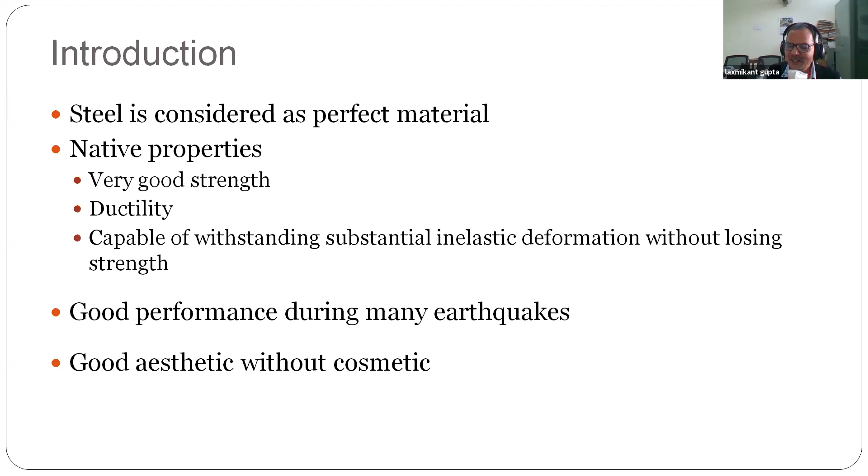Then what are the types of this steel? Now, there has been a lot of change in our country in the last 20 years. The use of structural steel has increased, and therefore a lot of work has been done in this particular area.

The first and foremost thing that has been done is that a single code has come out merging all old codes. If you refer to some book of an old edition, they will mention different names for the structural steel code. Now there is only a single code, IS 2062, in which IS 226, 1977, and 8500 have all been merged together. There is now a single code dealing with structural steel of all grades, so IS 2062 covers structural steel of medium strength and high strength both.

Then there is another steel, stainless steel, which is very rarely used for structures. Then fire resistant steel, also called thermomechanically treated steel, which performs better than ordinary steel under fire - this is specially for fire resistance.

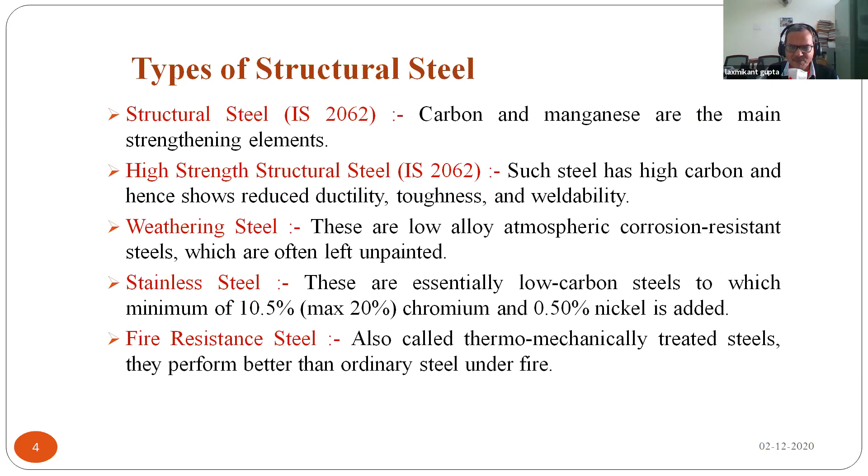Then the physical properties should be used uniformly. IS 800:2007 has given parameters which should not be assumed as different values. Density is 7850; even IS 875 part 1 for dead load also mentions 7850. Modulus of elasticity E is 2.0 into 10 to the power 5 in our Indian code. If you see ANSYS or other software, they prescribe 2.05 - probably American code also prescribes 2.05, but British code describes 2.0 into 10 to the power 5. So what I suggest, as far as our conditions go, these physical parameters should be considered while doing analysis and design of a particular structure.

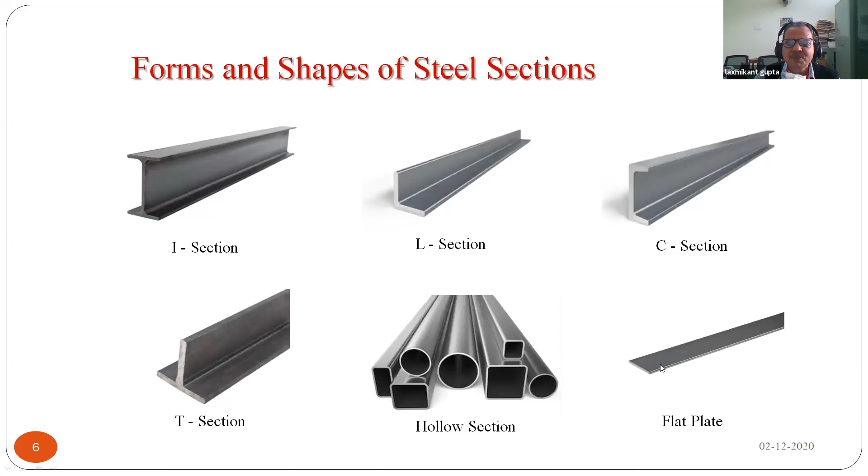Then these are the built-up sections. Those dealing with design or teaching students will see that built-up sections are two sections built and joined together by some system. There are two systems: one is the batten, another is the lacing. The third is the lacing-cum-batten.

So what happens here? If you see a single ISMB, its centroid is here. But if you take a built-up section, its centroid shifts here. So what is the physical meaning of this shifting of centroid? The material is being displaced away from the center, and that property will only be achieved when this connection is correct.

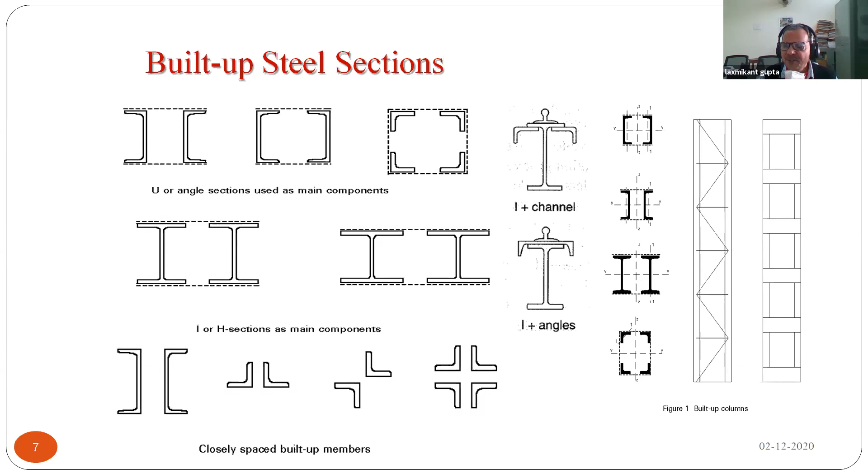If the connection is correct, it means it should be capable of transferring the forces through the batten and the lacing to the main member. If the battens and lacings are not properly designed, then it will act as two individual members. So everybody should keep this in mind: we very comfortably combine sections on drawing and say nothing will happen, let's just join two channels whichever way. No, it's never like that. It has to be designed properly with proper connections of lacings and battens.

Right, so this point has to be taken. Now, the good physical property of structural steel: the steel which is very strong in tension, and that's why it has always been denoted by the tensile stress, ultimate tensile strength, or the yield stress. One more thing I'll talk about next.

When IS 2062 was normalized into a single code, the nomenclature used in the code follows the international standard. So in our code, if I say E250, it is a symbol used at the international level.

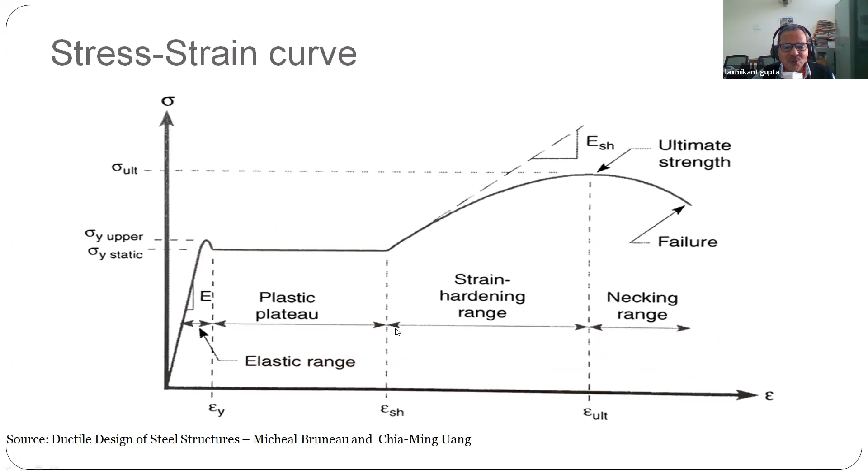Now this is being idealized to two straight lines. That means we assume that after yielding the stress goes straight, whereas practically it doesn't go that way. So this is called the plastic zone, and thereafter the strain hardening zone.

Now here if you see again, this part is neither elastic nor plastic. That's why this part is also called the elastoplastic zone. So we have the elastic zone, elastoplastic zone, and then plastic zone. So here now it is 100% plastic.

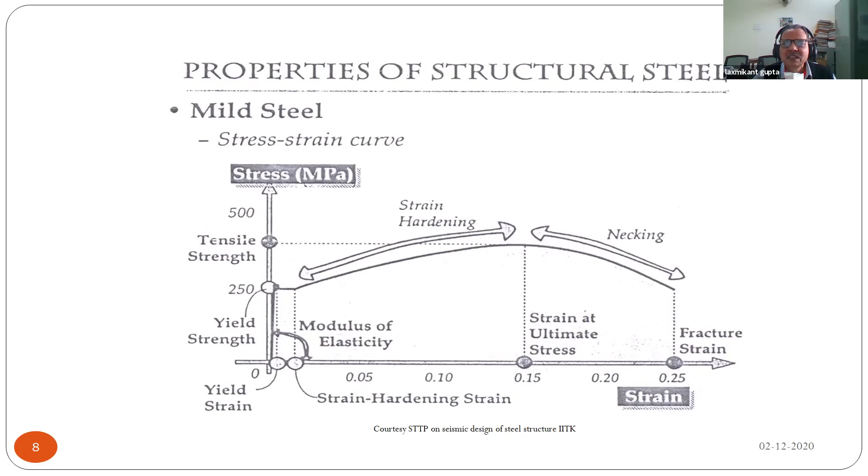E, stress upon strain. So what happens? Stress doesn't increase much, strain increases. So therefore E reduces. So when E reduces, deflection and deformation increase.

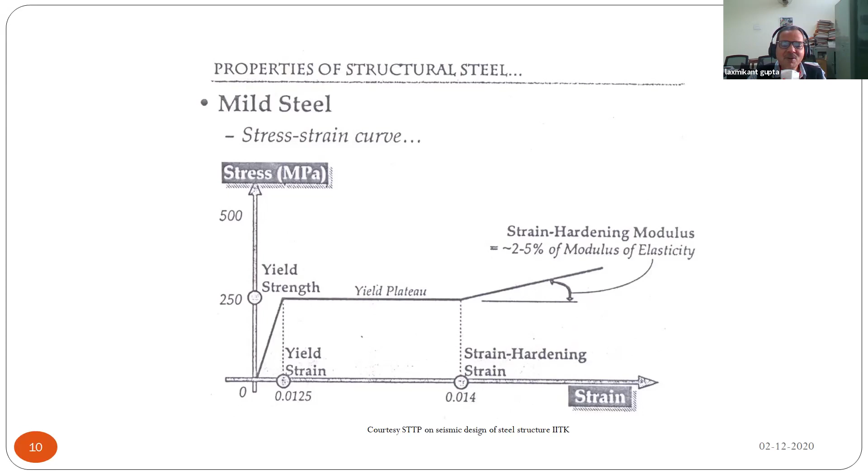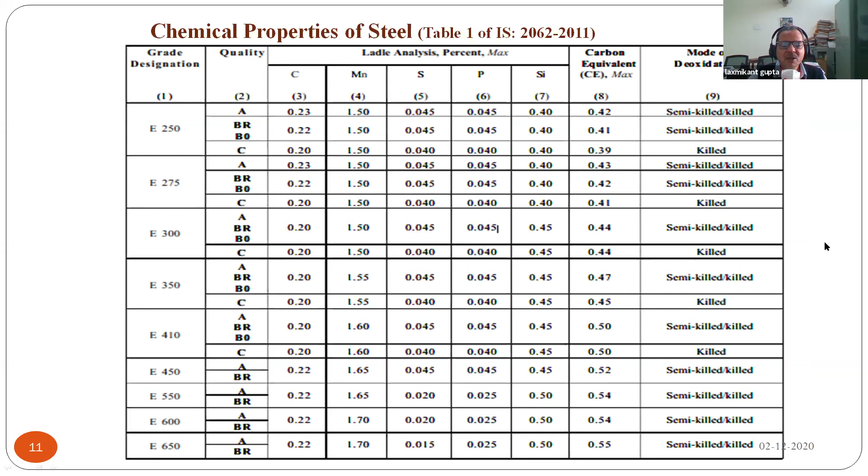Now this is the chemical property as per IS 2062. This is the grade and designation. These are the qualities, and we should have this much chemical composition, and the carbon percentage plays an important role. All these parameters play a very important role, as in the case of welding property and type of weld, welding electrode selection. So this all depends upon the carbon percentage. Then this is the mechanical property, as per IS 2062.

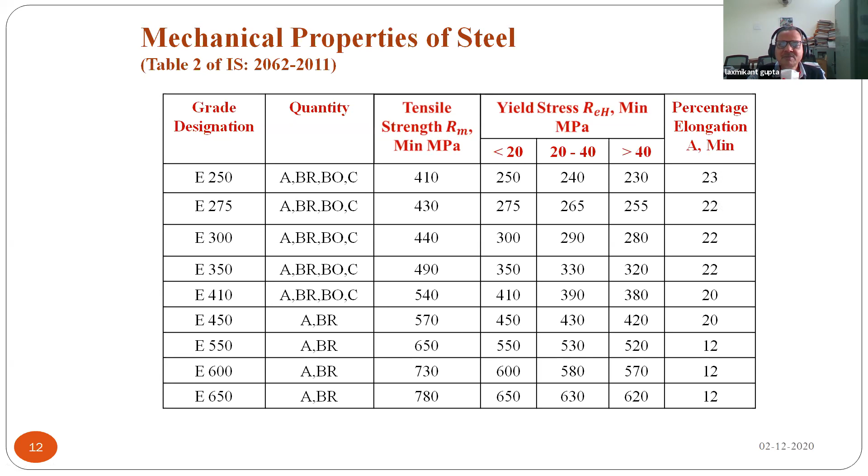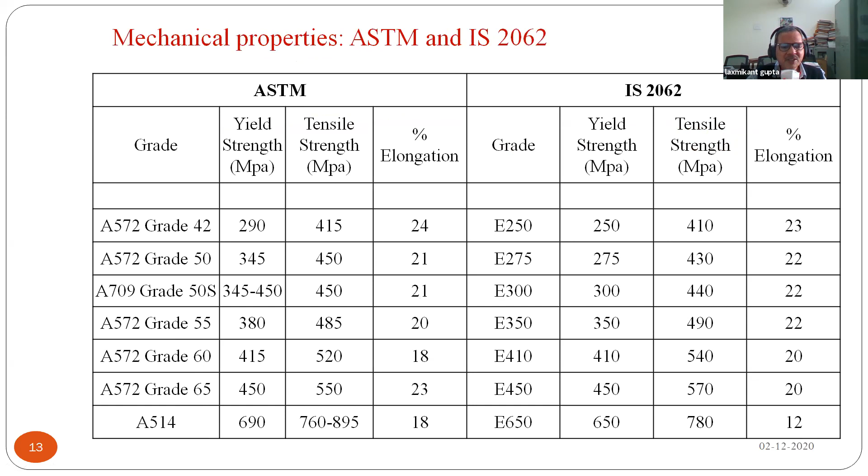Then this is a comparison of American Standard of Testing Material, ASTM, and IS 2062. The grade of steel almost matches: A572 matches with our E250, Grade 42. So like this, these are the American standards.

Now sampling. The material to be sampled for testing based on the piece to be cut from the location mentioned in this particular presentation. We should cut the piece of the sample. Now why do we want to cut? It should be stress free. If I take a complete ISMB or a sample, this can't be tested in a machine that takes a very high load. Second thing, it contains some stresses during cooling.

What that stress is, I'll tell you in the subsequent slide. So therefore, this should be free. This sample should be free from all the stresses, and this should move. It should give you the correct result. So this method of sampling is very important, and this should be cold cut, not hot cut.

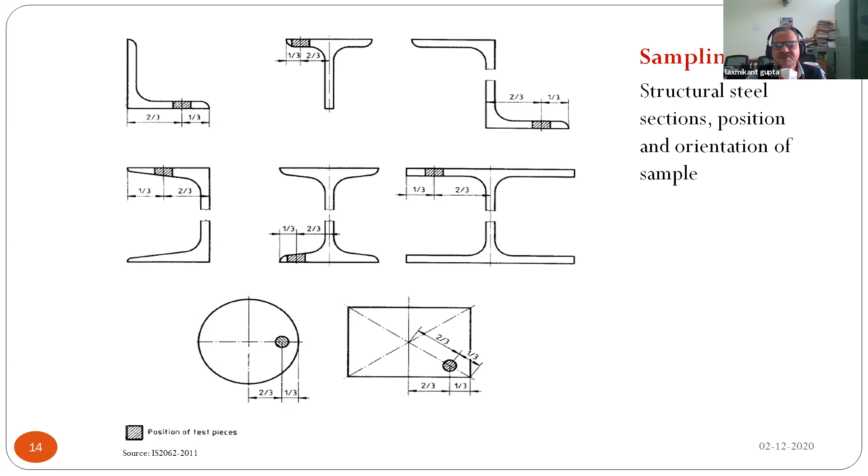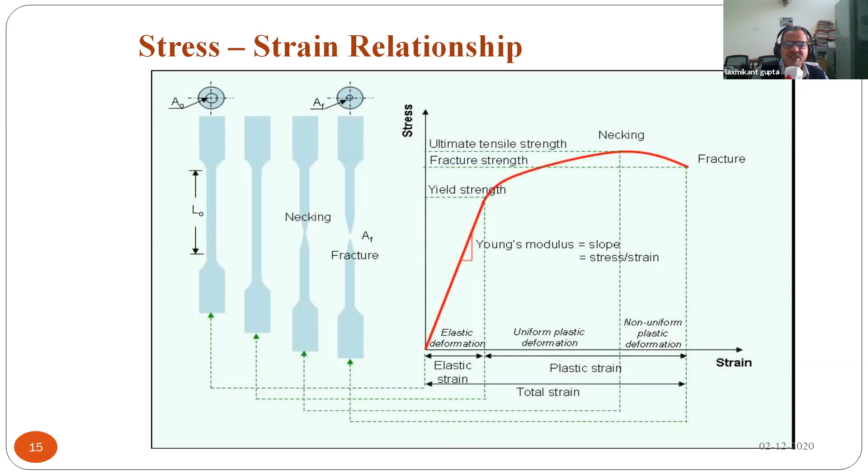The well-cleaned sample is to be used for testing to get the correct result. This is the sampling method as per IS 2062. It should make a sample in this particular format. This is the true and engineering stress-strain curve.

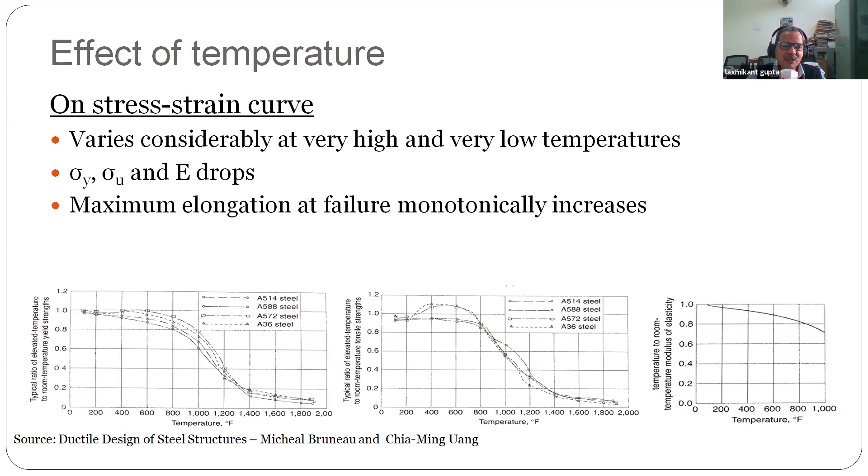Effect of temperature on stress-strain curve: it varies considerably at very high and very low temperatures. Sigma y, sigma u, and E drop, while maximum elongation at failure monotonically increases due to temperature. In industries where temperature rises because of the working atmosphere, and if an earthquake occurs, this parameter changes the stress level during failure. So in any industry with a high temperature atmosphere, you should also do temperature analysis along with earthquake forces.

Effect on ductility: there is no adverse effect on yield strength below room temperature, meaning at normal room temperature we retain the same ductility. However, lower temperature has a substantial effect on ductility, causing contraction. In places like Jammu Kashmir and Himachal Pradesh, industries in zone 4 and zone 5 face low temperature conditions, and if an earthquake comes, there is a loss of ductility. This line must be utilized for temperature analysis.

Then there is behavior change from ductile to brittle, and this ductile to brittle transition temperature should be checked by the CHARPY-V test. So in addition to our routine tests, we should also do the CHARPY-V test to check the effect on ductility due to temperature.

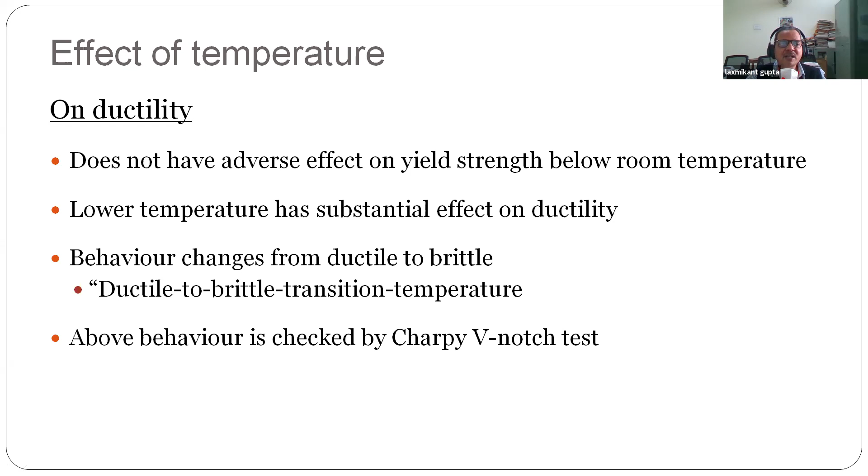Then strain rate. What is strain rate? Strain rate is defined as velocity upon length of sample between the jaws. That is called strain rate.

Now, effect of strain rate on structures: the intensity of the earthquake force or lateral force is not defined, whether that force acting on structures happens at high speed or low speed, because the force is generated from the earth. Whether it goes very fast or very slow, that creates an effect of strain, called the strain rate. I told you strain rate as per lab conditions, but strain rate as per structural considerations is different.

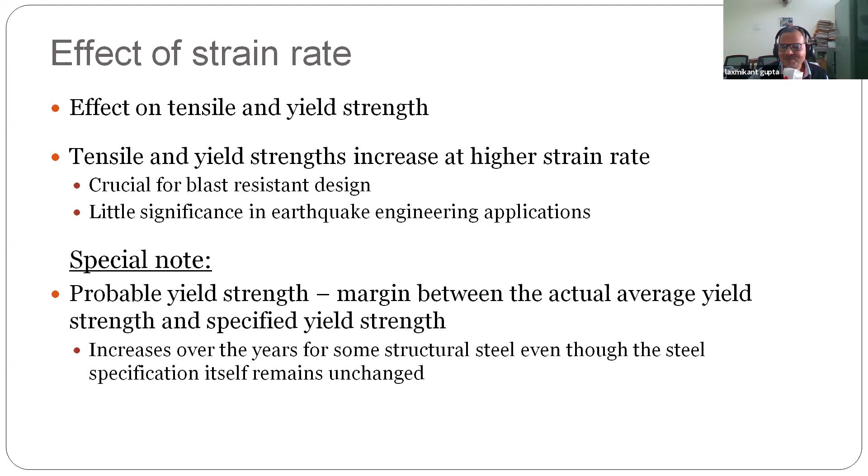When corona started in March, all stadiums, grounds, and gyms in our country were closed. Our players were worried about their game because there was no practice. You could see Virat Kohli playing cricket on his terrace, so that aging should not take place. It means you should maintain a good biological cycle, walk, do some exercise, and have a morning with a good breakfast.

So structures also behave like a human being - this is strain aging. When steel is unloaded after being loaded into the strain hardening range, and left unstressed for a certain time, its molecular structure changes. This is what aging means, what we call the aging factor, just like with my own age. So do not worry about aging, you should remain fit by doing your routine proper exercise.

Upon reloading, yield strength and tensile strength increase while ductility and fracture toughness decrease. Why does this happen? Material dislocation or defects in the crystal structure cause slip planes to develop. Yielding means the flowing of material in the body of the member, and therefore yielding takes place. Strain aging occurs because nitrogen and carbon atoms migrate to these locations. There is a study on this, and I have put a reference here as well, so what is the conclusion or lesson from this?

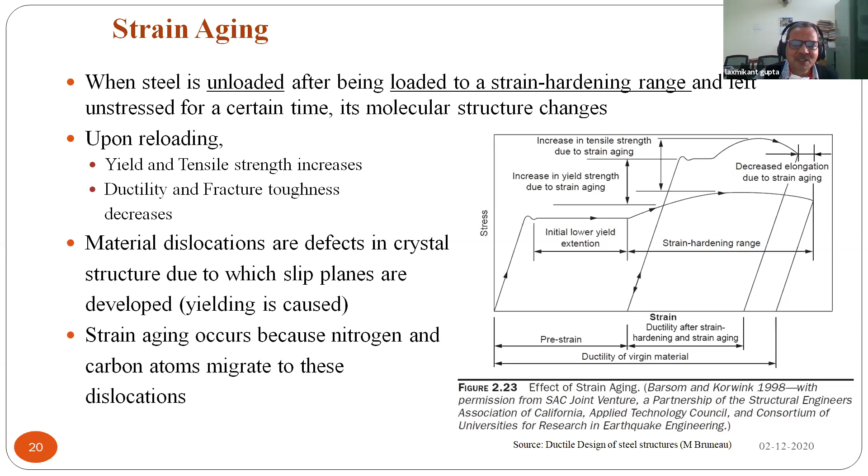So now why am I teaching all this? Give a thought to it. I have given a thought, that's why I added it here. You should also think about why I am teaching this and where it is needed. Yes, it is very much needed — you should not allow corrosion to generate in the structure, meaning you should do maintenance.

Because gravity load, dead load, imposed load, or your gravity loads are determined and known, but lateral forces because of wind and earthquake — though our topic today is earthquake resistant design, similar exercise is also needed for wind resistant design. We also teach courses on wind resistant design since similar things are required, as wind is also a lateral force. We predict the wind force and calculate it, define it, and do the analysis, but this corrosion issue can also happen along with the wind case.

Then corrosion fatigue: it develops uniformly corroded material, cracks become visible, and it reduces the fatigue life of the steel.

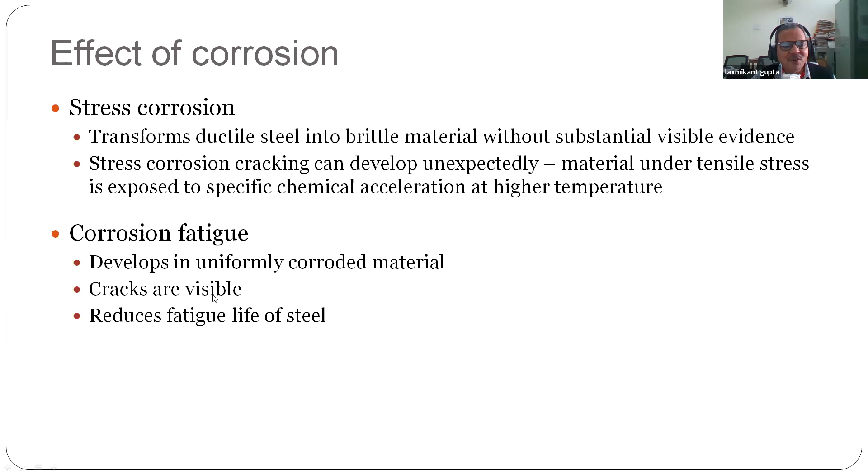So in short, the lesson from this slide is that we should not allow corrosion to generate in the steel. The ductility of the corroded steel increases stress level for a given load, and leads to longer stress ranges under fatigue type cyclic loading. Under monotonic loading, the ductility of the steel is not detrimentally affected by the corrosion.

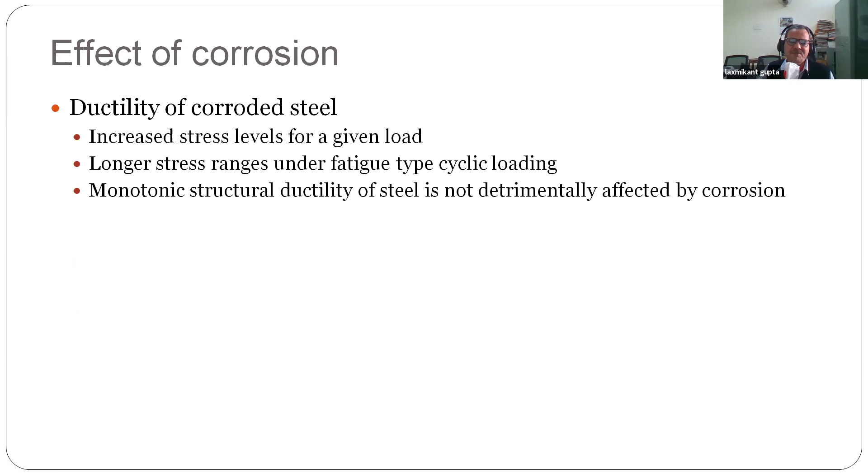Okay, so this is about the effect of corrosion. Now, the method of design — and we are very much comfortable with the method I am presenting now — is the working stress design, also called allowable stress design.

The stress caused by the characteristic load must be less than an allowable stress, which is a fraction of the yield stress. So what we do is take a stress level which is a fraction of yield stress — say 0.6, 0.66, 0.45, or 0.4. Specifically, 0.6 for tensile stress, 0.66 for bending stress, 0.45 for maximum shear stress, 0.4 for average shear stress, and 0.75 for bearing stress.

So these are the fractions, and we allow stress up to that level, meaning we don't go up to the yield level. Here we allow 0.66 times Fy in bending. Now, what is the yield stress Fy? It means if I load up to Fy and remove the load, nothing happens to the structure. So how much difference is there? 1 minus 0.66, that is 0.34.

In earlier days there was a clause that when dead load plus live load plus wind load is acting, you can increase the permissible stress by 33%. This is that 33% here. Why so? Because dead load and live load remain constant, but wind comes for a particular duration — it comes and goes — and that force is also taken as a wind working load, so we allow that type of increased stress. Students listening to this lecture, if asked in interviews why there's a 33% increase, should say it's because of this particular difference: we allow up to a particular limit, but when a load comes for a short duration, we allow an increase in the permissible stress.

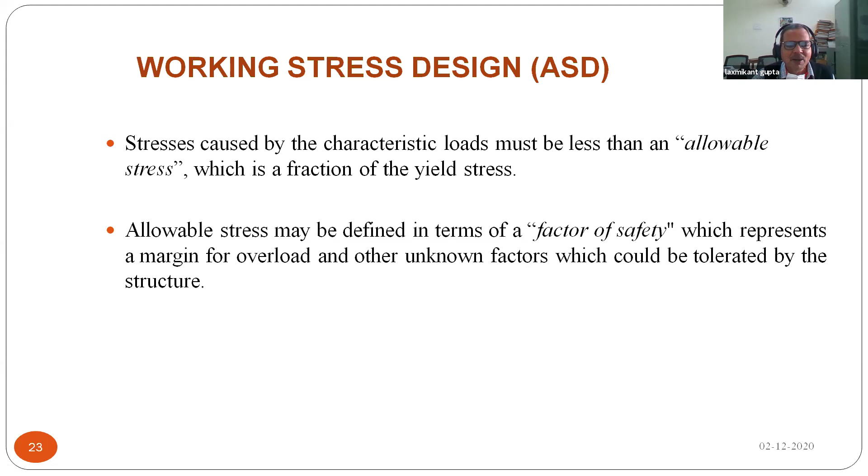That was the condition mentioned in our IS 800:1984 code. The allowable stress may be defined in terms of factor of safety, which represents the margin of overload and other unknown factors that could be tolerated by the structure. So the stress at top is the allowable stress, and at bottom too is the allowable stress — so we are in a very, very safe zone. We define allowable stress equal to yield stress divided by factor of safety.

What are the limitations? We never consider monotonicity. What behavior do we assume? Linear behavior — the non-linear behavior of post-buckling stress, and the property of steel to tolerate high stress by yielding locally and reducing the load, are not accounted for. We never account for all these things. There is also no allowance for redistribution of load in statically indeterminate structures — we'll discuss that sometime.

Okay, so this is what allowable stress design is. Then we shift to the limitations of allowable stress design, which is being resolved, and we now consider limit state design. So what is the objective? It is achievement of an acceptable probability that the structure will perform satisfactorily for its intended purpose during the design life, with an appropriate degree of safety to sustain all loads and deformations, and adequate resistance to certain expected accidental loads and fire.

Whether you go for the working stress method, the limit state method, the plastic analysis, or any method based on experiment - there is one more area: design based on experiment. You make a structure, a prototype or model of that particular structure, and load and test it. That is called design based on experiment. A lot of structures have been tested this way, especially if they are being made for the first time or are some new unitary design.

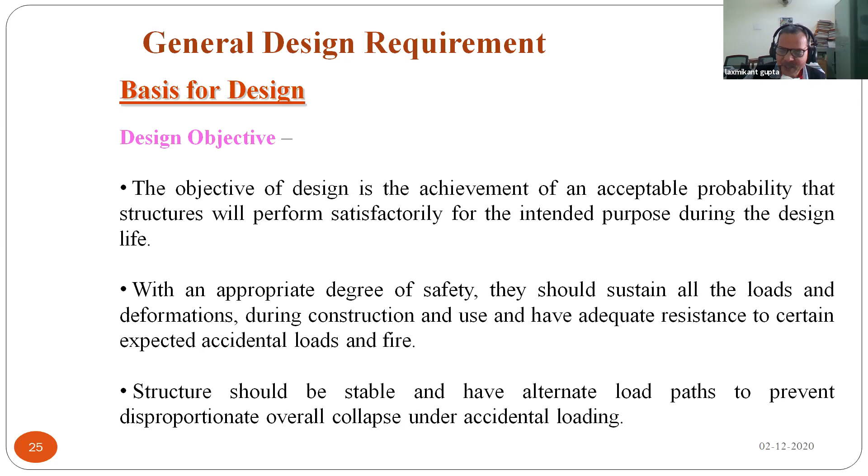Then there is a condition mentioned that if you can't adopt the limit state method, you can adopt the working stress method.

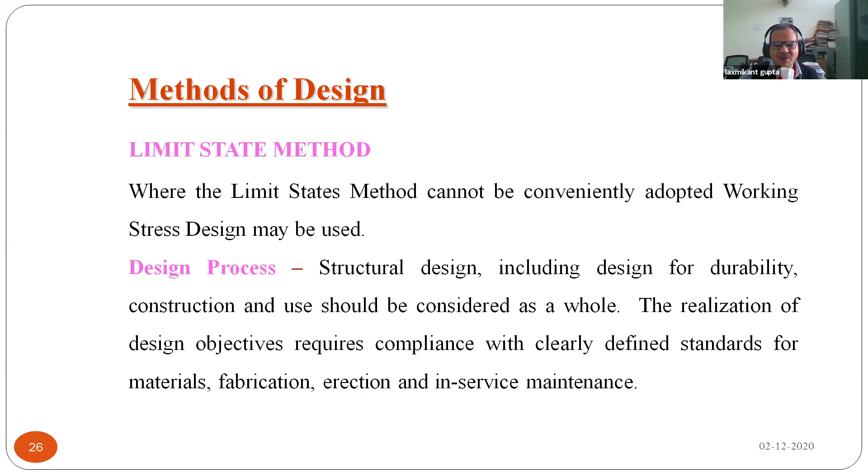Then the loads and forces. In short, we should use the probable action which is going to occur. Now load has been defined as an action in steel design, and there are two types of action: permanent and variable. These loads are dead load, imposed loads, wind load, earthquake loads, erection loads, accidental loads, and secondary effects. For all these loads we have to use IS 875.

Wind load is now as per IS 875:2015. For other parts - part 1, part 2, part 4, and part 5 - it is still as per 1987. And earthquake force is as per IS 1893 part 1.

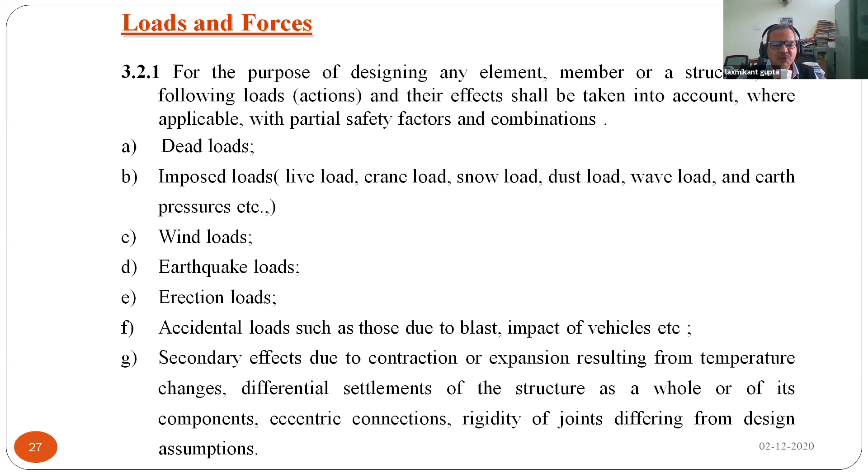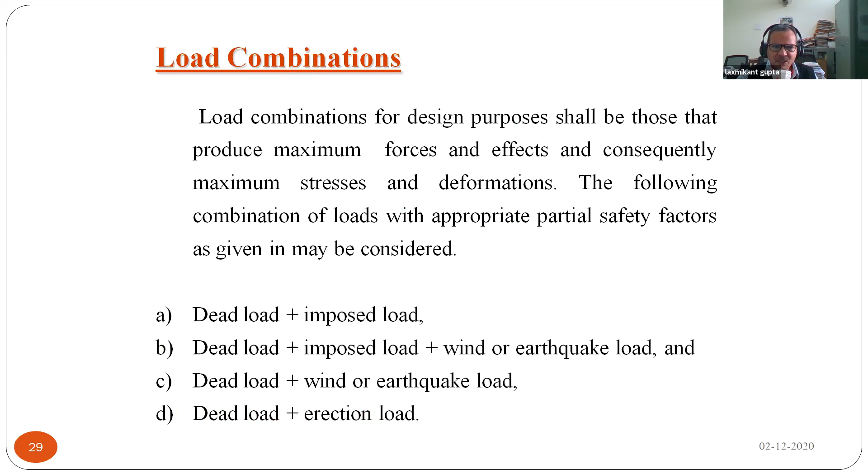So these are the things to be considered. Then there is load combination as per our code.

Then, the background or basis of limit state design is based on plastic analysis. Therefore, in this background, I added some things about plastic analysis. How much time do we have? We still have some 15-20 minutes.

So these are the assumptions on plastic analysis. Here, in plastic analysis, the first and fundamental part is that stress reaches yield stress, meaning yielding of the cross section takes place. At every fiber, there is a uniform stress. That's why the assumption is that plane sections remain plane before bending and after bending, and plane section remains plane before axial force and after axial force. Whatever we say, we always put an assumption in our classroom.

So plane sections remain plane, and there is linearity of the strain diagram. Here, linearity of strain diagram exists because strain has not increased - strain at failure is different than strain at ultimate. You can see in the stress diagram, strain at fracture and strain at ultimate are two different values. So up to failure, they are linear - the strain diagram is linear. This means at the starting point, there is some initial strain available in this section.

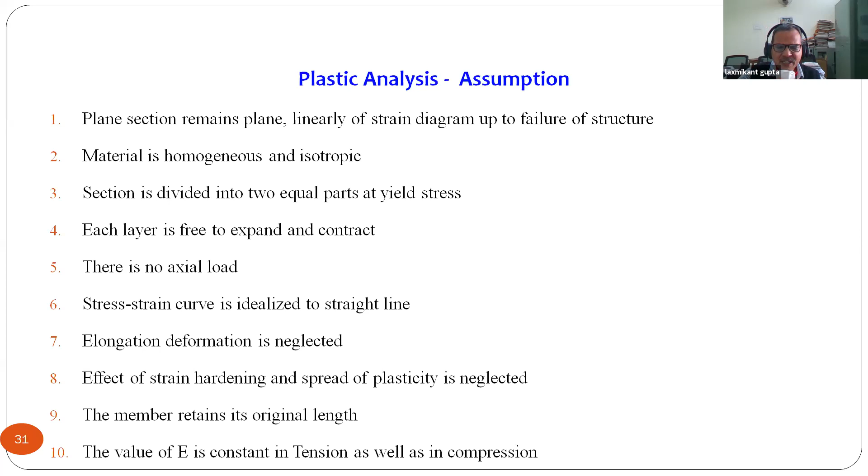So here now, the plastic bending. In plastic bending, we have started with a beam with UDL.

And at working stress, what are the stress levels? At working stress, the stress levels are linear. Strain is also linear, but they are all less than the yield stress.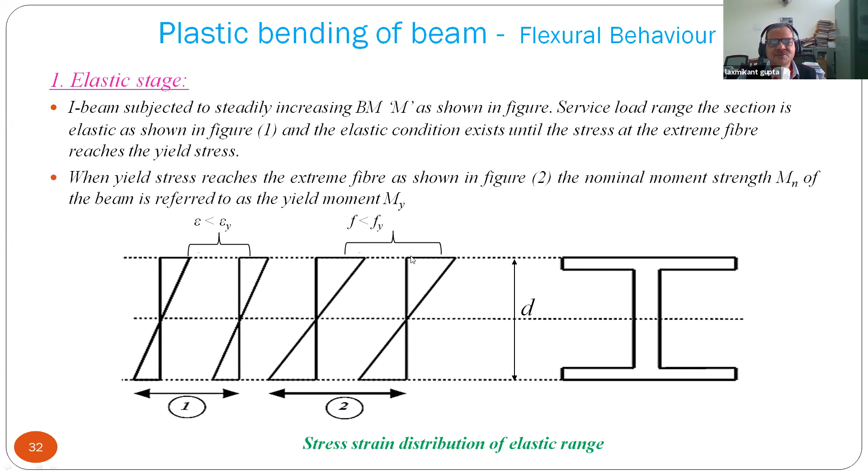Then this is what you can see - the stress distribution across the section in the elastic stage, and the curvature relationship that also becomes linear, because if you write down the equation, M by I equals E over R equals sigma over Y - that is Bernoulli's equation of bending. If you write down two parts, one on strength, another on serviceability - that is on curvature, M over EI equals 1 over R, and that R depends upon the deflection of the deflected shape of the beam, and that deflected shape is nothing but the elastic curve. What is the equation of elastic curve? EI d square y by dx square equals minus M. So these are all interrelated to each other.

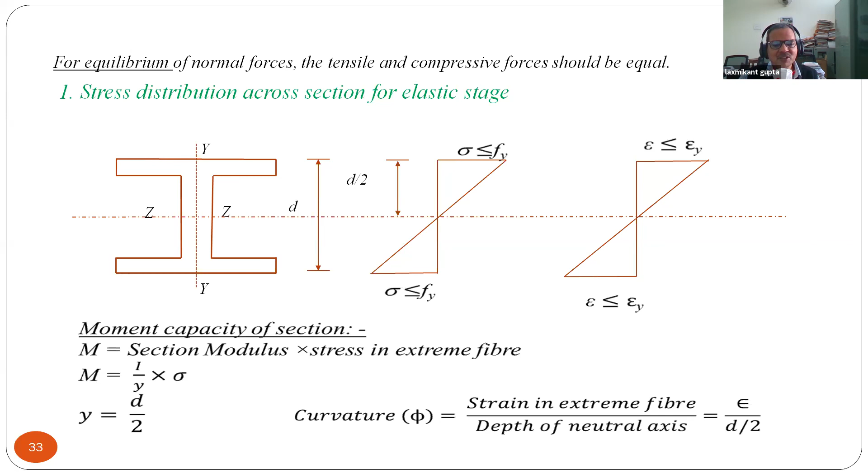Then if I increase the load, yielding takes place. At yielding, again the stress at top and bottom are at yield stress, and inside, the fibers are still in linear stress distribution and are elastic. Again the M over EI relationship equals 1 over R, so that becomes My upon EI equals 1 over R.

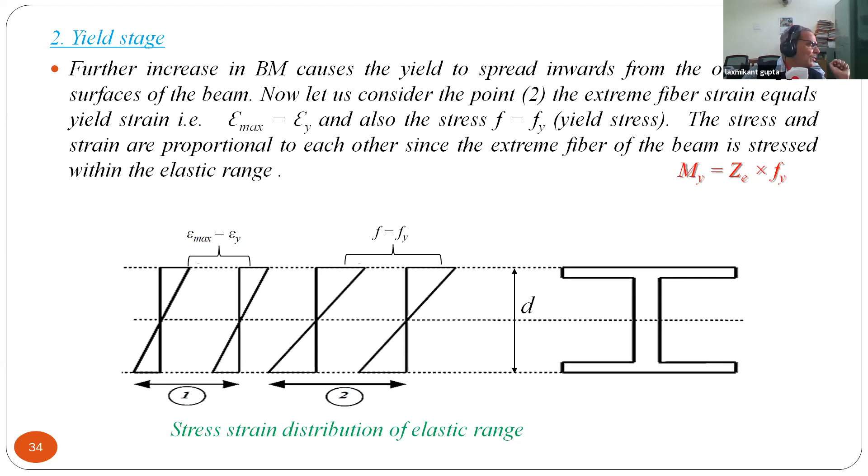Then if I again increase the load, there is a propagation of stress inside the fiber, and the part of the structure is now in the plastic part. That means here the stress level doesn't increase. These stresses are already completely developed to the yield stress, but the remaining part, you can see, remains elastic.

Here the moment curvature relation changes, and the nature of the moment curvature relation diagram becomes non-linear.

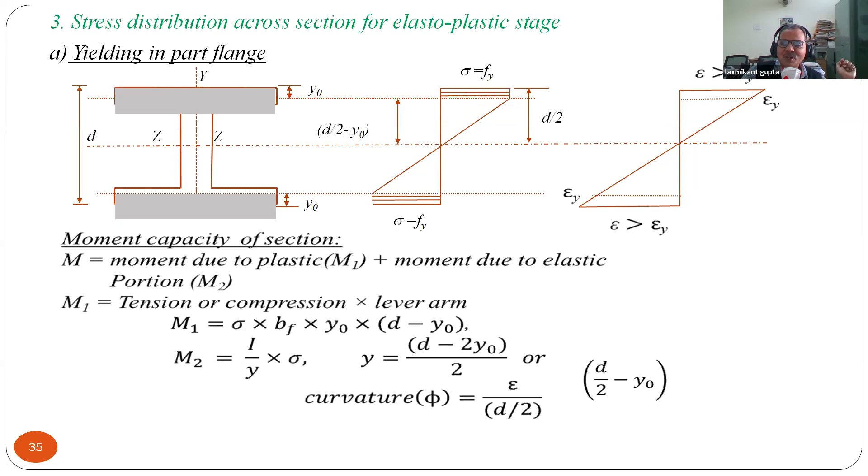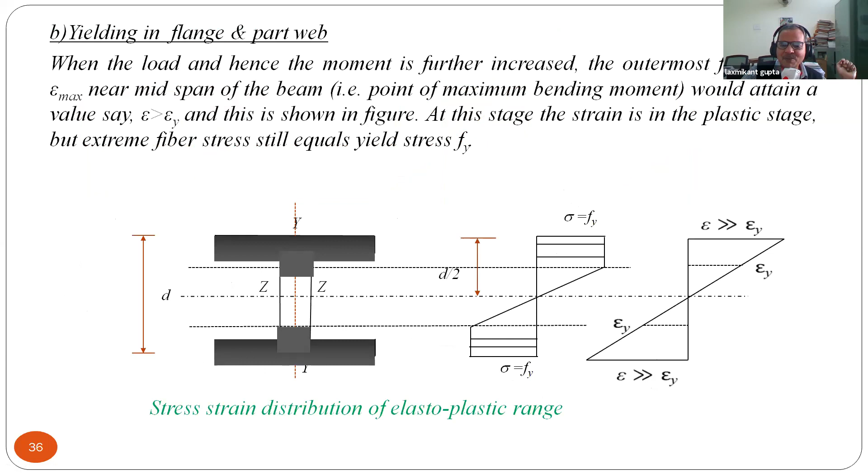Again, it propagates inside, meaning a part of the web also, so the stress distribution becomes elastoplastic, and then finally it becomes fully plastic.

You can see here the strain diagram is again linear, which is much greater than the yield strain. That means you can relate to the first slide, if you noted down the stress strain relationship. So this becomes plastic.

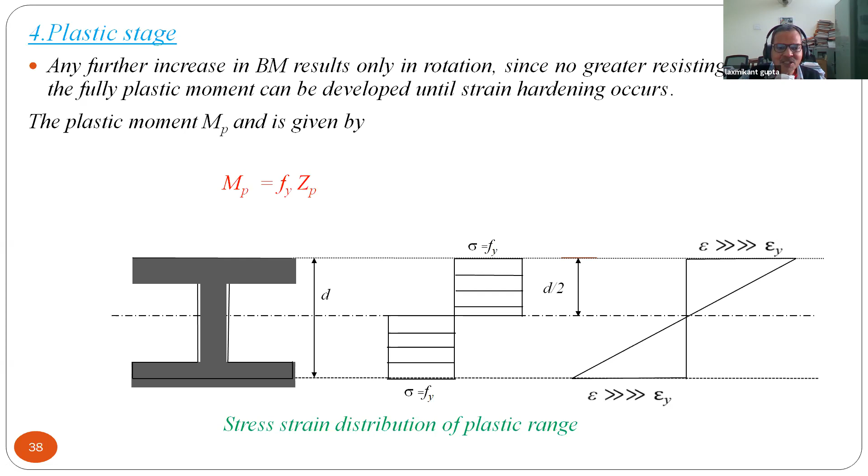Now all these four stages only occur when the outstand upon thickness of flange should be within a specified limit. That means here what theory is involved under this moment curvature relationship and the bending relationship is the plate theory, and that is the basis of classification of the cross section.

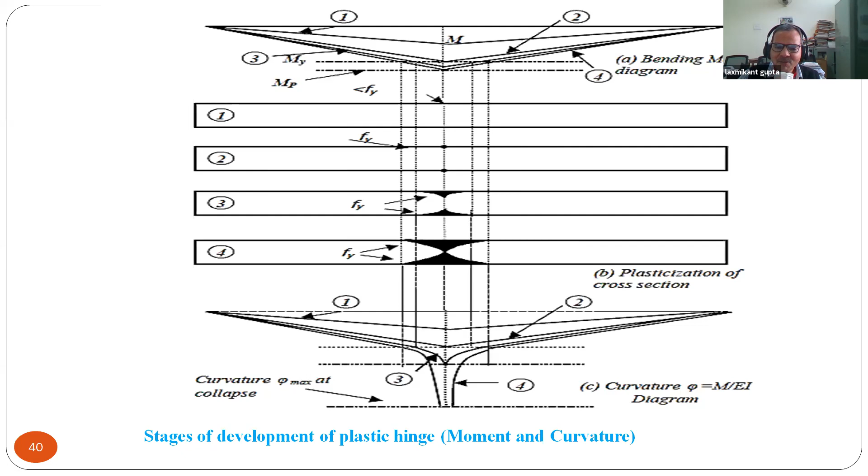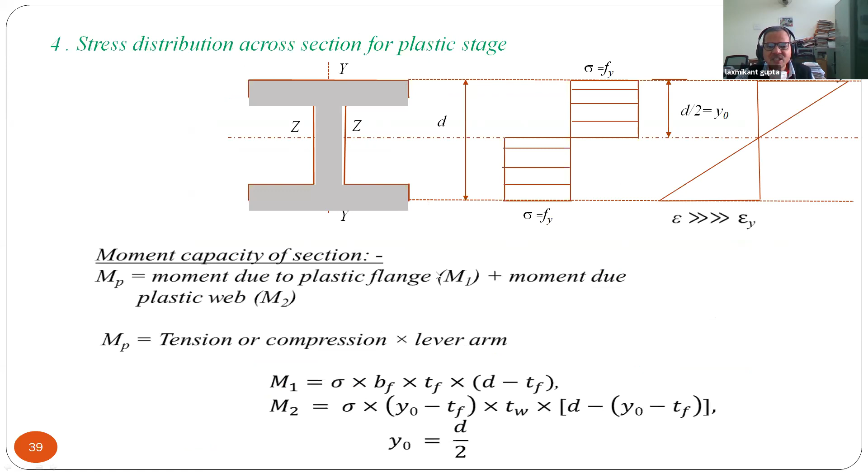Now the sections are classified based on the moment curvature relationship, and this curvature relationship only occurs when this b/2 versus t is within particular limits. That is based on the plate theories. The plate theory of plates is required here. That equation, tau CR is equal to...

This classification is now plastic, compact, semi-compact, and slender. Plastic means they should take high rotation capacity. Where it only rotates, it becomes compact, and semi-compact is nothing but our working stress method, between the elastoplastic method and the plastic method.

So therefore, there is now a wide range of cross sections available. You can use a wide range of cross sections to classify them, which was a limitation of our IS 800 before, where we could only use one type of cross section. Now we can use a wide range of cross sections here.

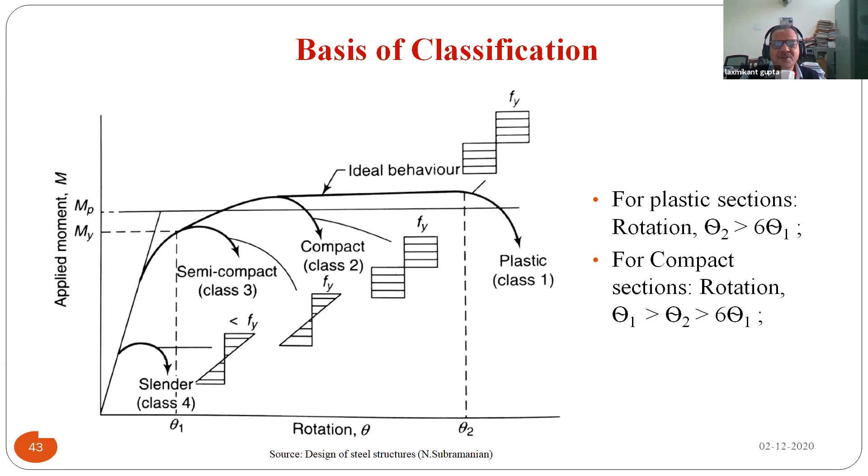So this is the basis, as mentioned, and these are the definitions. Plastic moment is when the whole section goes into the plastic stage. Shape factor is nothing but the ratio of full plastic moment to elastic moment, and that enhances the capacity.

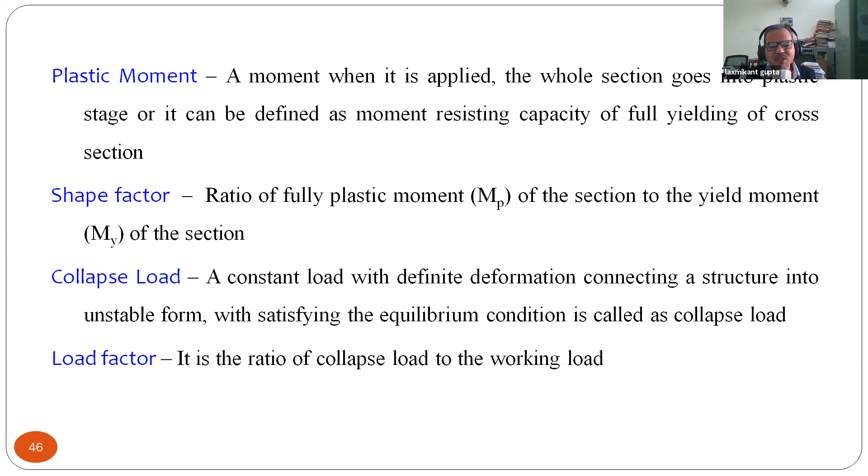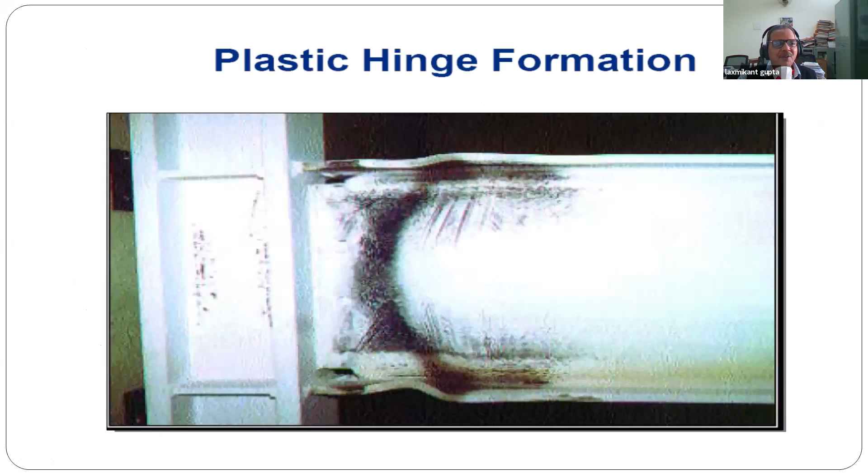This is the plastic hinge, how it forms. Then there is the effect of axial force on plastic moment, because you can't accommodate this axial force otherwise. That's why our assumption was that there is no axial force acting on this member. So axial force is added here, and we have to take its effect.

Therefore, what I suggest is that N upon NP, this actual axial force and the plastic axial force relationship, and MN upon MP—N upon NP should be less than 0.15, meaning 15% of the cross section area can have axial force, then there is no need to reduce the plastic moment. The same particular clause is given in IS 800:2007, for how the revised plastic moment is to be calculated considering the effect of axial force.

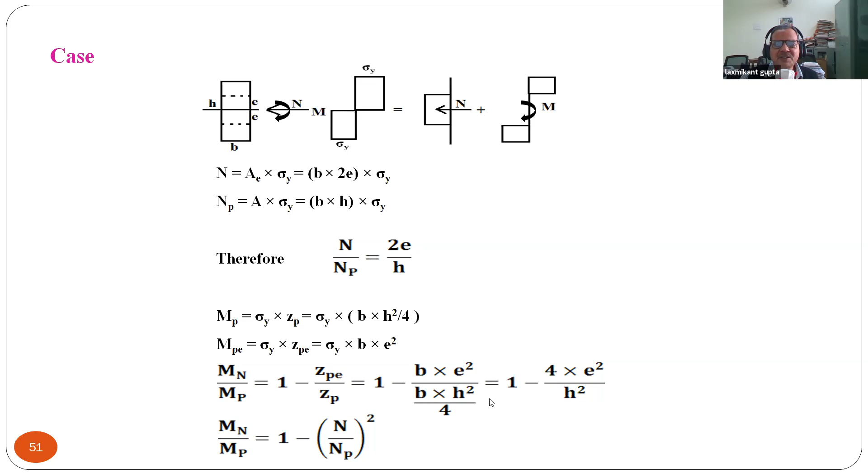Then the effect of shear force on plastic moment.

Now how to calculate redundancy: for a beam, total vertical reactions plus end moments minus 2 gives the redundancy. For a frame, it is 3 times the number of loops minus the releases at supports gives the redundancy.

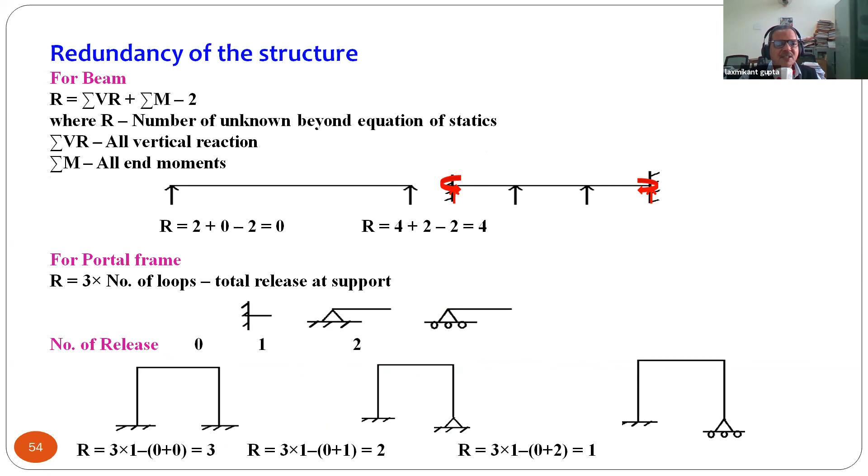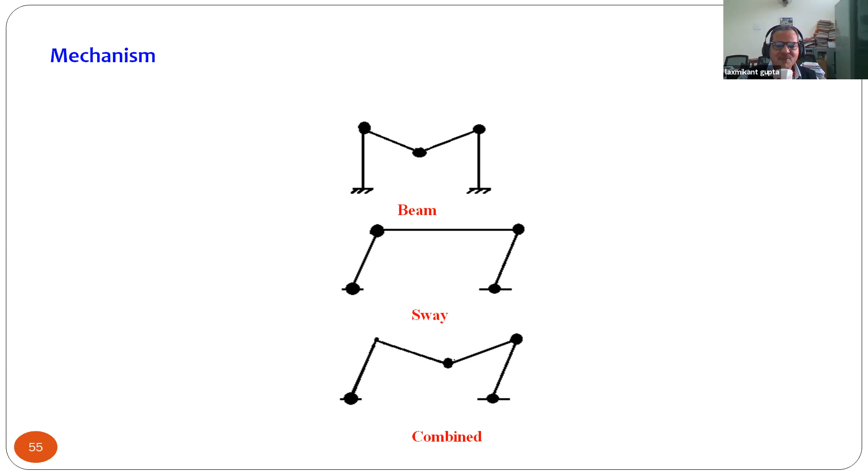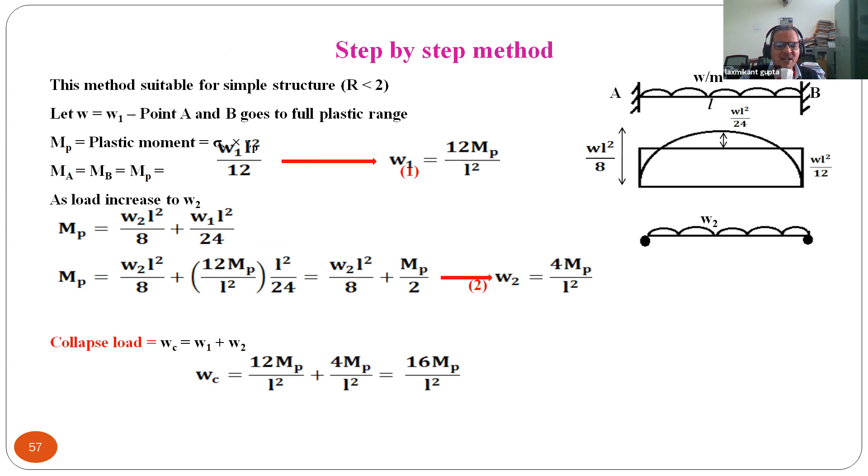This is a simple step-by-step analysis which shows for every hinge how much load is required, and we calculate the collapse load step by step. That's why it's called step by step.

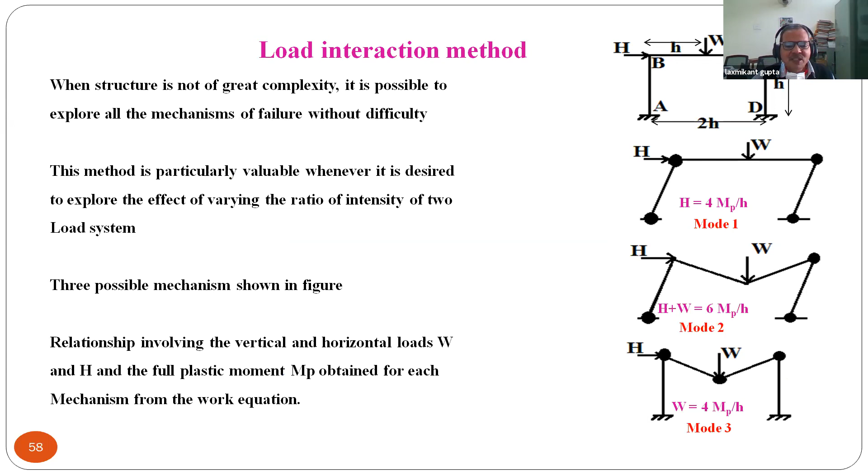Load interaction method is very important. We can interact lateral force versus vertical force and find out under which mechanism the structure can collapse, so we can draw the zone where it can collapse.

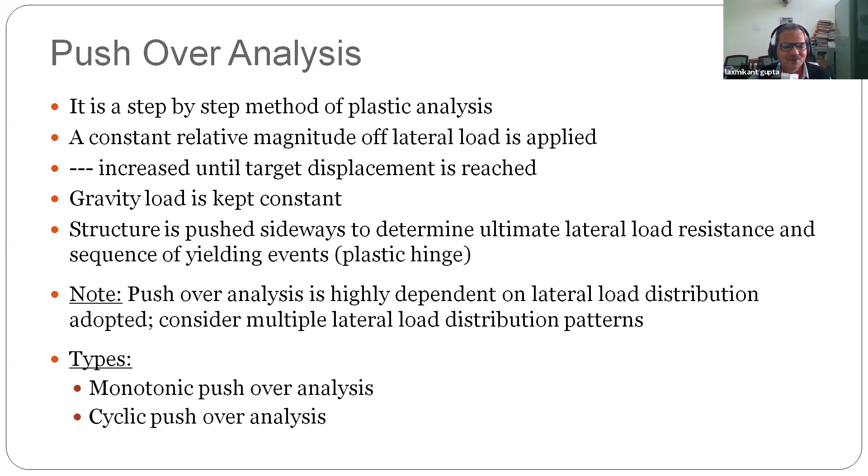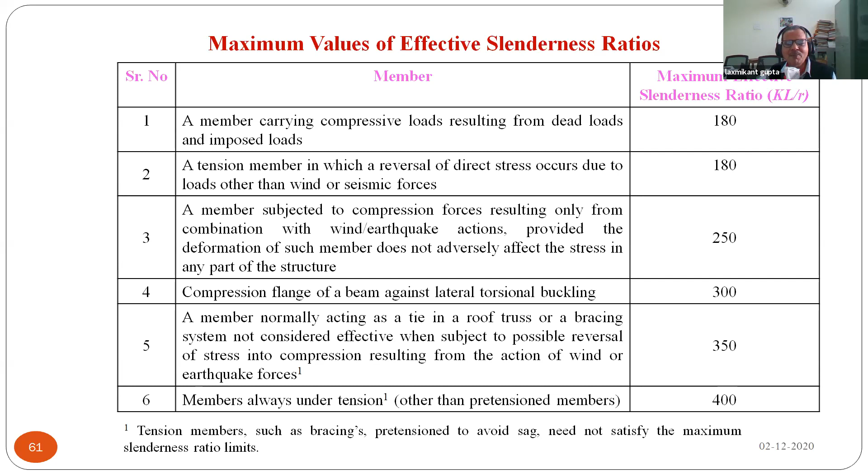Then maximum value of effective slenderness ratio should be followed. The maximum value of KL/r ratio or slenderness ratio has to satisfy this condition, otherwise the member itself will buckle before it can take load.

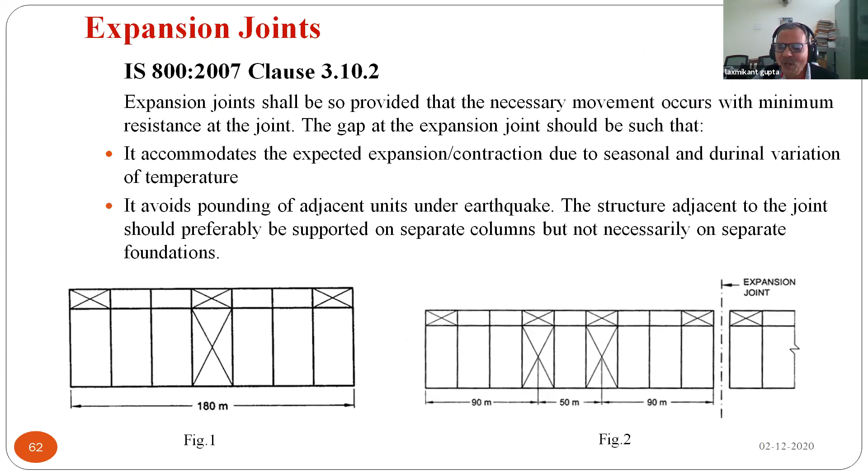Then expansion joints should be given. If you are not giving the expansion joint, critical temperature analysis is a must.

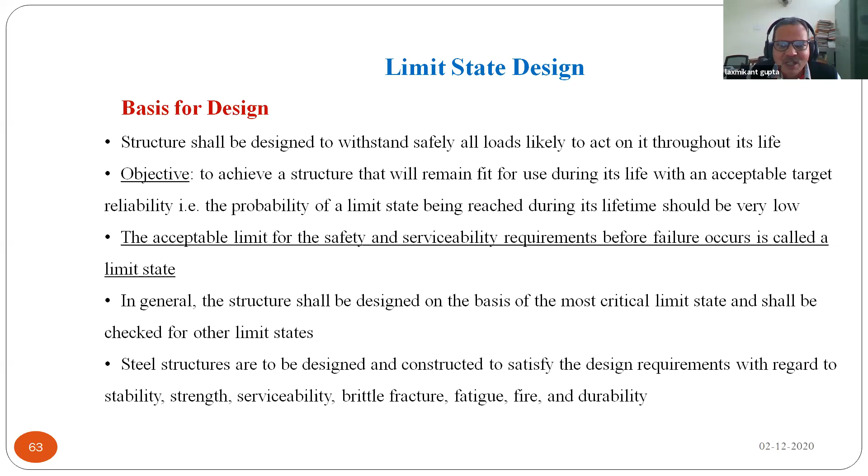The structure is to be designed for the most critical limit states to satisfy requirements for stability, strength, serviceability, brittle fracture, fatigue, fire, and durability. All these are included in limit state design. There are two limits to be considered: limit state of strength and limit state of serviceability.

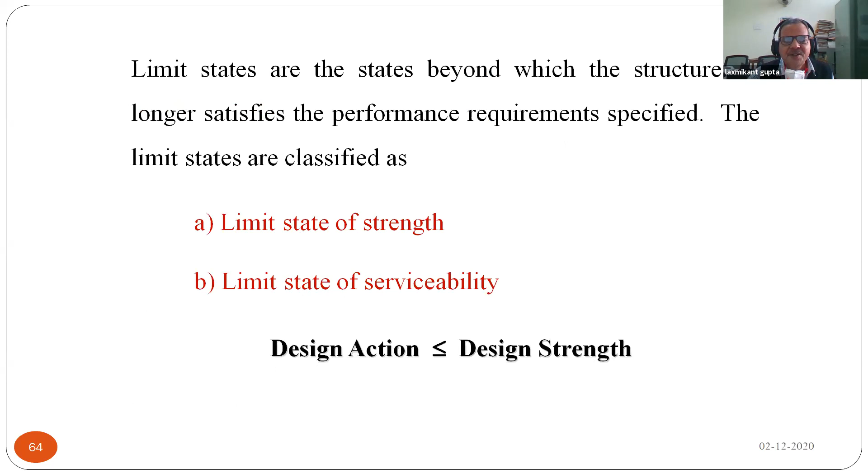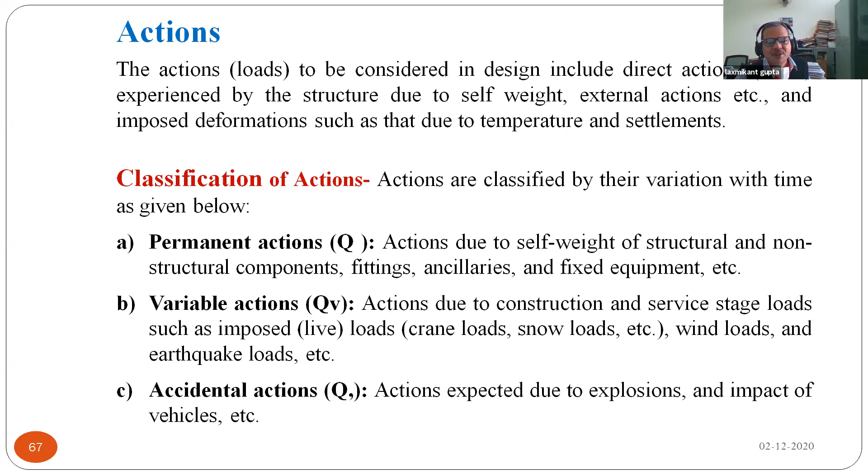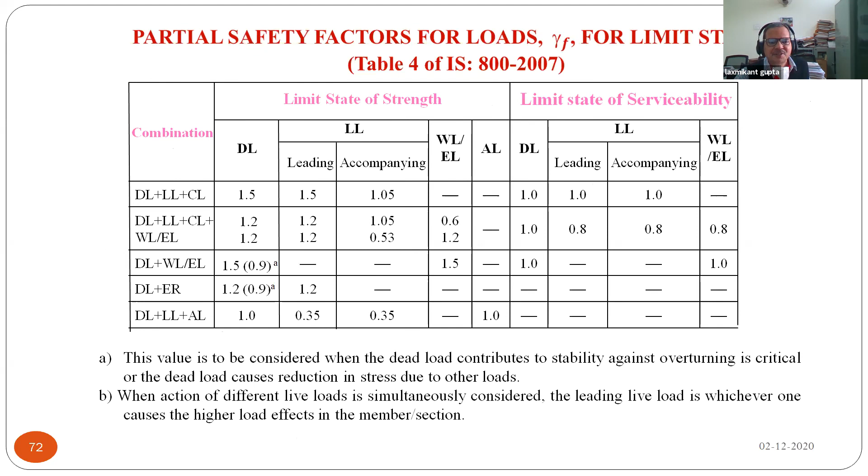Characteristic load is defined. Then these are the load factors considered as per IS 800, and load factors for the material are also given.

Now there are two more important things here. Since we are extracting strength from each and every fiber of the material, there is always some imperfection, so imperfection has to be considered. Lack of verticality, lack of straightness, lack of flatness, lack of fit should be greater than standard tolerance. So this geometrical imperfection has been included, and the imperfection parameter has been included in calculating the strength. So there are some imperfection parameters in our routine formula of stress calculation.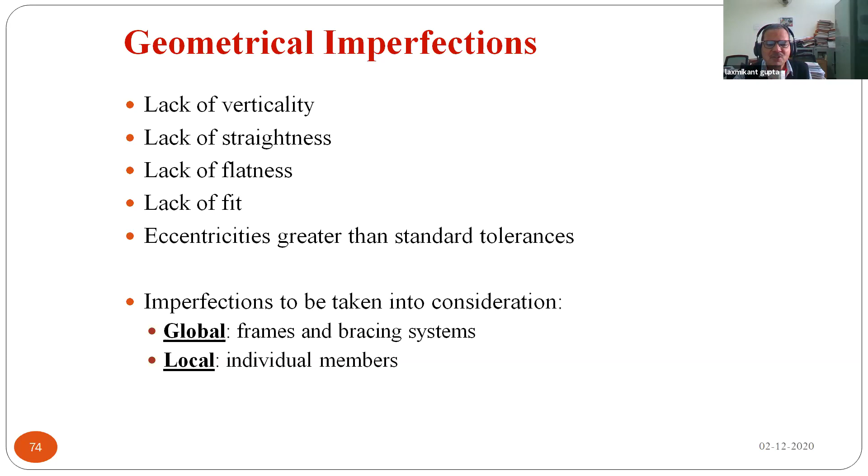Then out of straightness to be tested considering the sample: 1 in 1000 should be the out of straightness allowed. So 1 in 1000 out of straightness is allowed here.

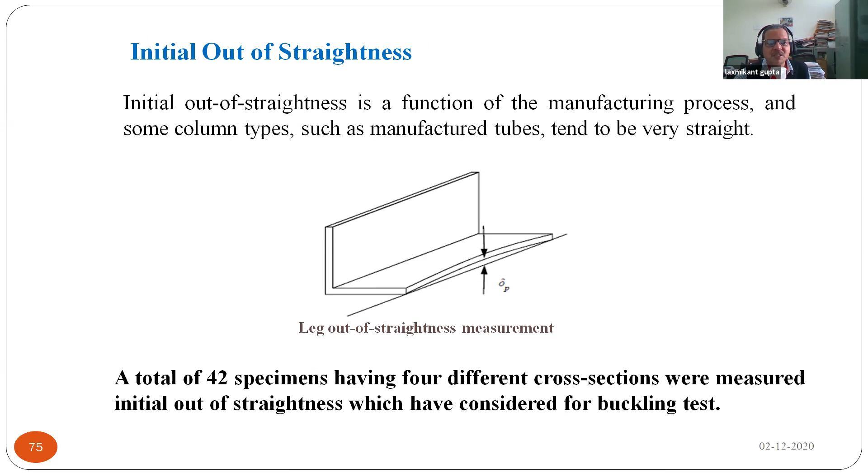Then the important part here, residual stress. I'll tell you how it is generated. Rolled sections are formed by making basic iron red hot in a soft condition, which is pushed through dies to get a shape like an angle, channel, or I-section.

When it is kept on natural ground for natural cooling, during cooling, if this point and this point which are free cool first, and this point cools late, the member should not warp. So stresses of both natures get developed in the material due to cooling, and that stress is what is called the residual stress.

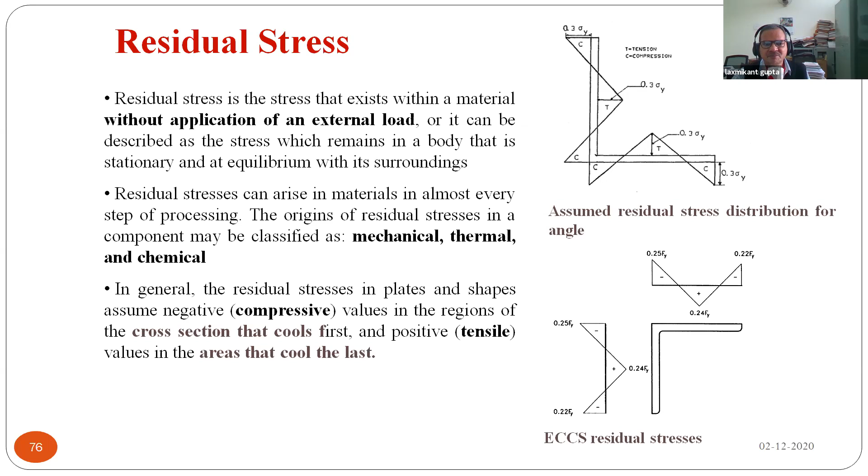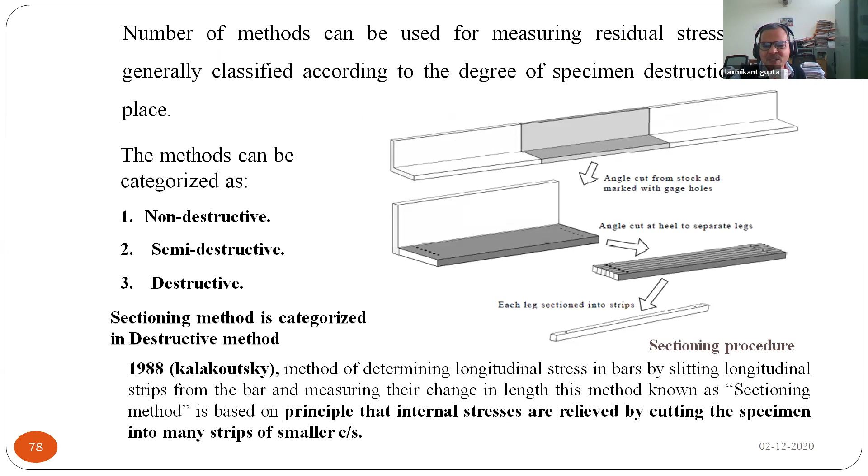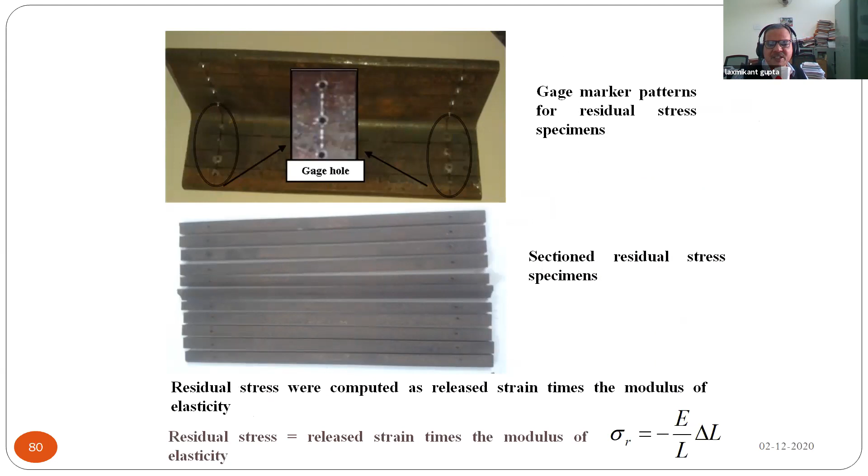You can see this stress contour of the residual stress. This is the destructive method for finding out the residual stress - you cut a member, then cut it into small wire piece members, and measure it with the help of this demountable mechanical strain gauge to find out the strain. These are the samples. This work was done by one of my students, Jyoti Bhalave. This is the result of the stress levels.

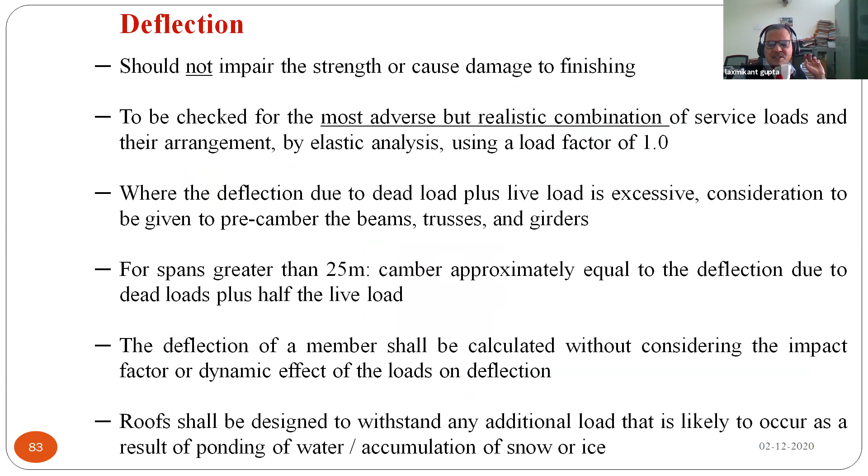Now the last point I am closing here is the deflection. Deflection should not impair strength or cause damage to finishing. For all practical purposes, the value of load factor is always 1 in all cases, and the limits are like this. These are produced from the IS 800 2007.

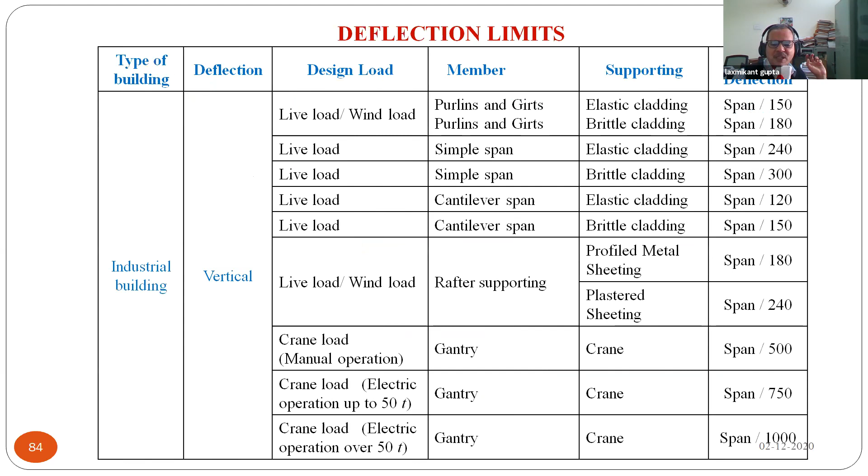So friends, this much I presented today because of my another assignment for the PhD Viva, so I may not continue here. I will close here, and you can ask the questions. If I have 5 minutes, I can take questions here, so if I can answer, I can answer it right now.

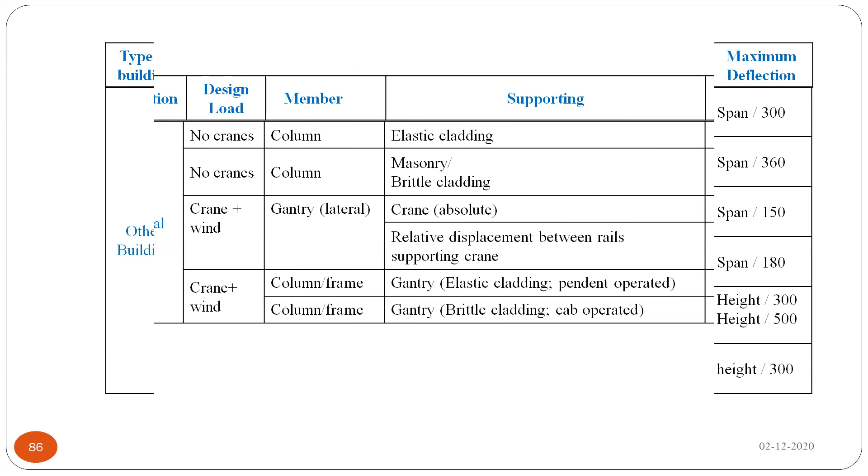This was one of the important topics, because today most infrastructures are using steel, and understanding the behavior of steel is very important. Thank you for giving light on this topic.

There was one question by Shubham Kolle. He is asking about what topic for MTech research, if you can suggest any.

He can interact with me directly anytime - I just want to know what he wants to do, then I can suggest him. Shubham, you can directly communicate by mail to Gupta sir, so that I can communicate. Or there are some good MTech students, they can join together - we can have one Google meeting where I can interact with them, because I just want to know what their interest is. Based on their interest, I can pick up a topic so that you work on something you're interested in - that way you will get success on it. That will be better also.

Another question was there from Mayank: during analysis, what difference will it make if we use true stress instead of engineering stress? It will make a difference because the value will change.